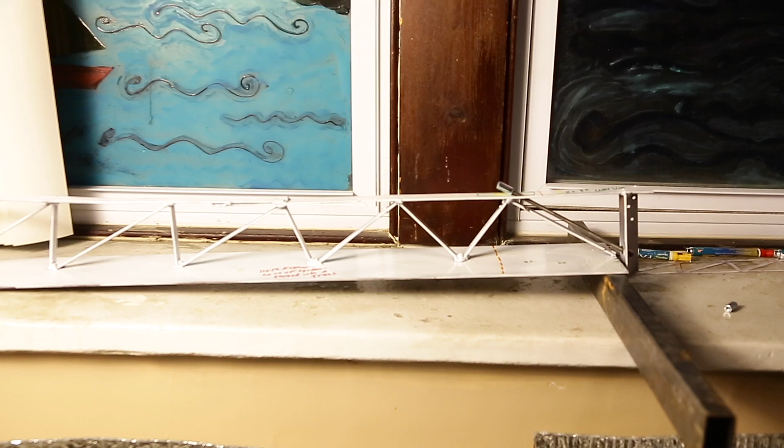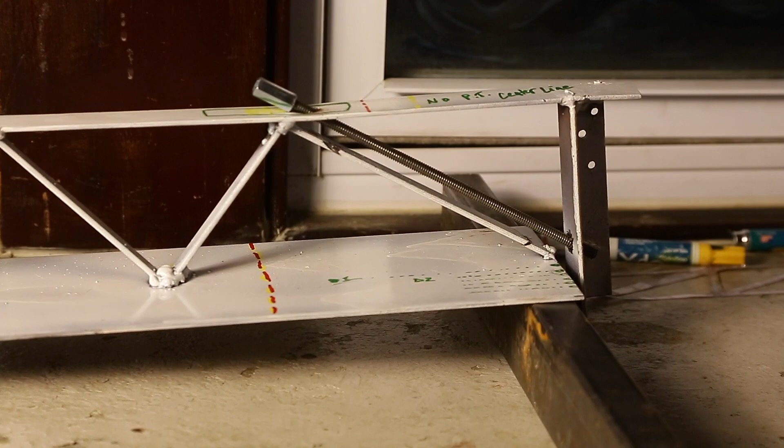Okay guys, so same structure. Now we're on video 5. I'm going to post a 3A, so it's a 3 and then a 3A. But in this, from video number 5, I cut, let me make sure I have the right video view, different camera. Gotta go this side. Don't want to block your lighting.

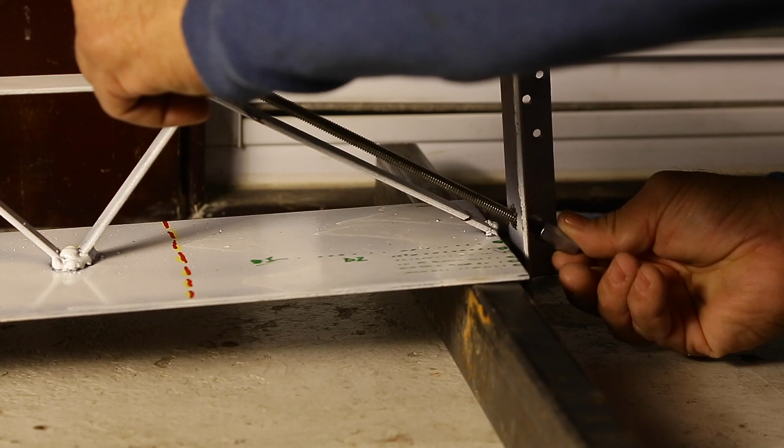So I cut number 11. See, it's cut. The bar has been detensioned, totally detensioned. The nut is off. That's important. If the nut's on, the range will be limited by when it hits the ends of the nuts, when it hits the limits. We'll keep it on just a hair.

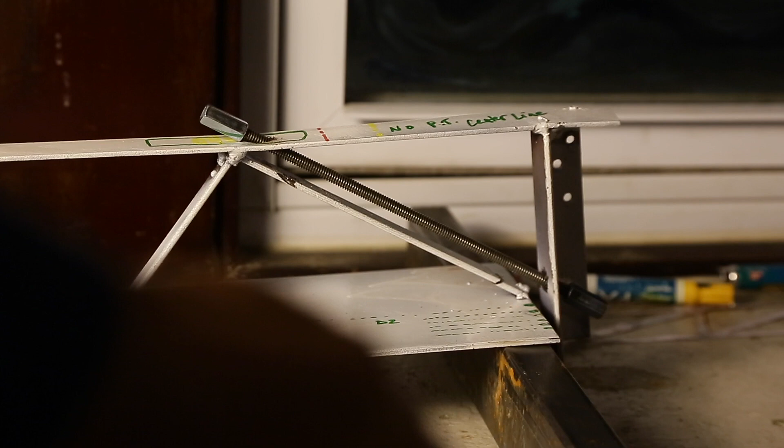I'm going to put not really insignificant, but just a touch of load on the center there. I'm going to zoom back in there and I want you to watch with this little bit of a load. Let's see if I can get it. This time I will not be able to stand on it. With this, it's just going to be a little hand pressure. And you're going to watch the deflection. A little bit of hand pressure.

And all I did was put a little bit of pressure, downward force right here. A little bit this time, like, doesn't take much at all. So this deflection is what creates this reaction down here. This reaction down here isn't created on its own. It has to have a load on it.

Right now, this is the dead load of this scaled model, not scaled to weight, scaled to size, plus or minus 3/8 of an inch max, I would say. This deflection here in the deck, the canopy and deck, will create the reaction out there. Now, but that's a compressive crack. Initially, I think when it had a downward force, we have the deflection happening at the moment they detension. That's in video number 3A, I think it is.

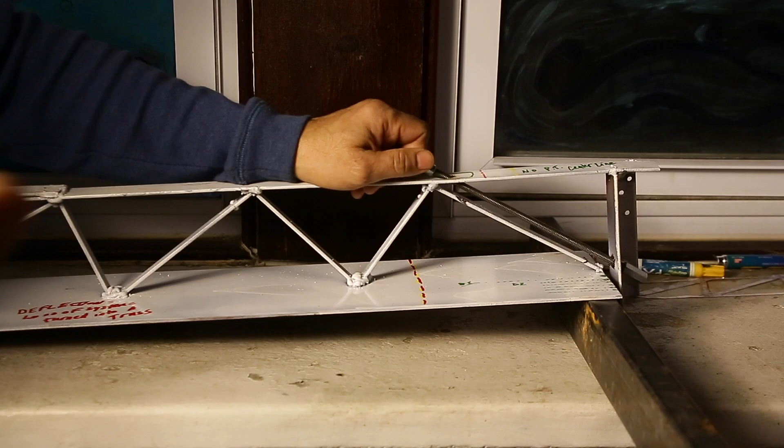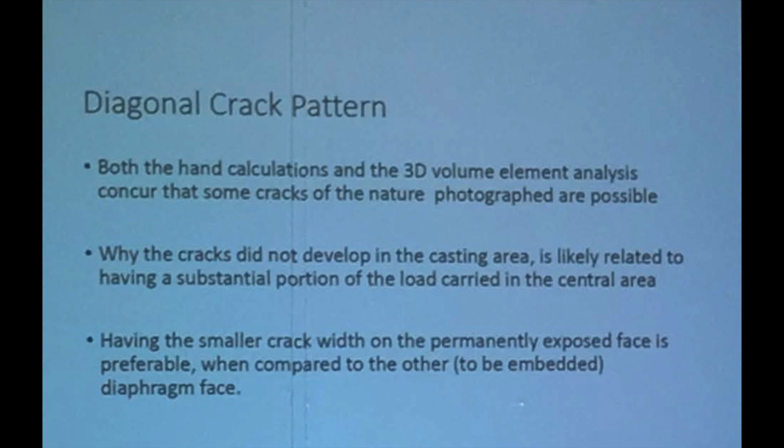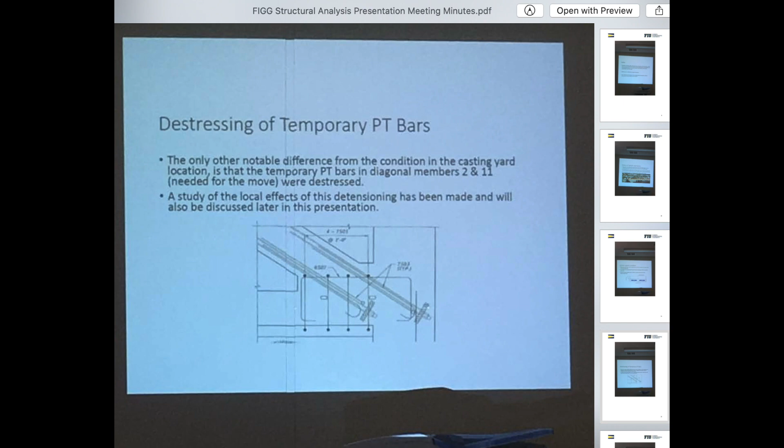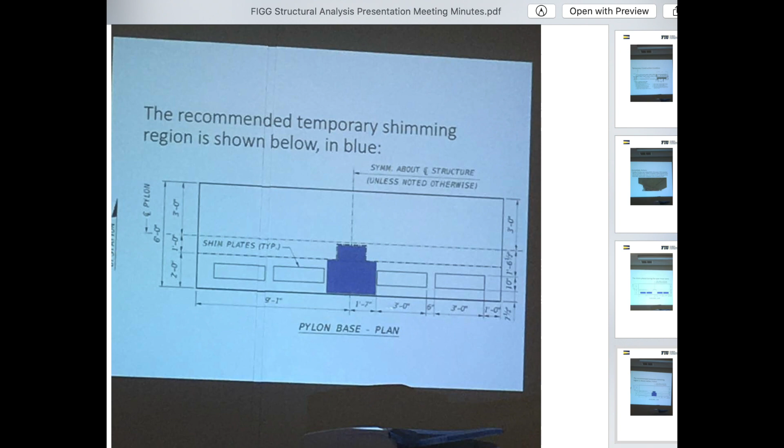They're going to add the shims after, part of their product, to help fix this issue. But yet, the shims are also going to contribute to the failure, because they're going to create a new moment, a new connection, a new pinned connection, if you will, based on the weight. And that's going to make that new hinge point, for your engineers out there. The shims created a new pin point. When they created the new clamping force, they had the 2 pin points and just broke it in the middle.

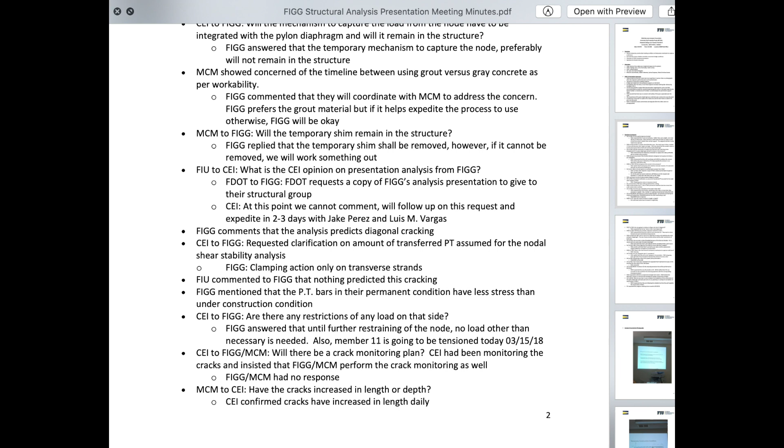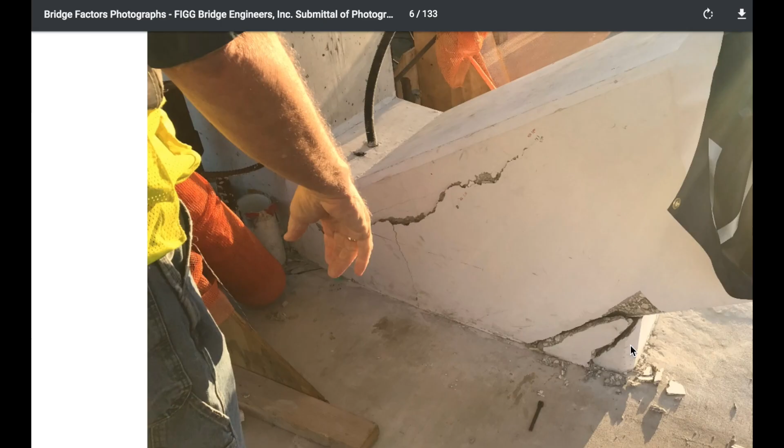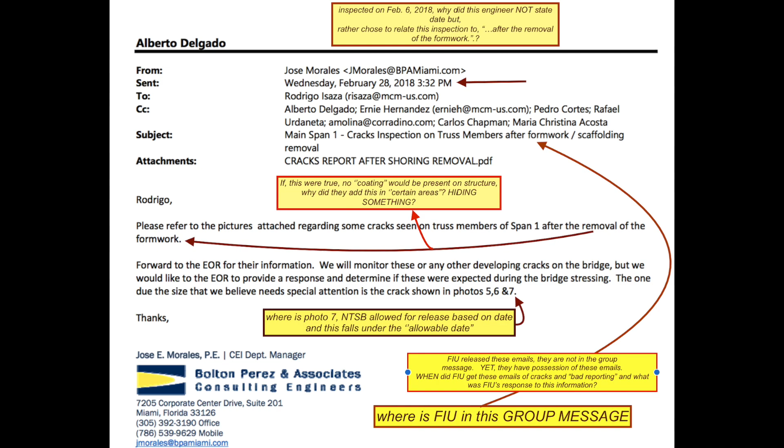And, of course, now we have these cracks. These are not compressive, because of what I just showed you, how that torque action took place. This is terrible. This is terrible to keep this hidden from the public also. I think I have it in 3A. That's what's important, and I've talked about this before, that they talk about the cracks happening when they took the forms away.

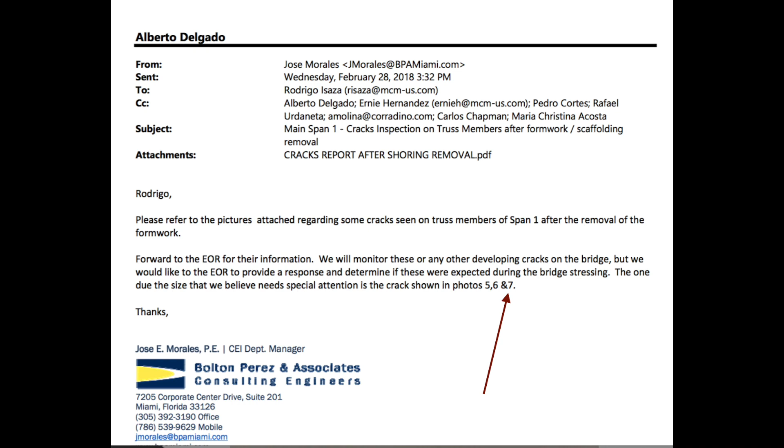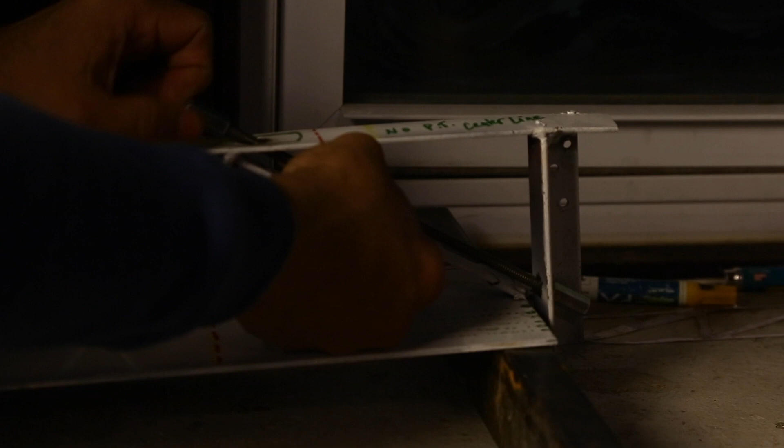Just a little bit of deflection. It doesn't happen on its own. This does not elongate and start pushing on its own. It needs a force to make it react down there. When you put the post-tensioning back on it, in the rod, this helps hold that connection together.

And so let me do that real quickly. I'm just going to do it live for you. Post-tensioning it back up. So now, of course, it's limited to the bar when I put the deflection on it. It is a smaller range. Let me make sure where I'm filming. Yeah. So it is a smaller range that it will cause destruction, if you will.

Once you detension, though, that range now gets all the way out to whatever it's detensioned to. And as they detension, it says it cracked like hell. It didn't really crack like hell. It was already there, as we show in video 3A and other videos.

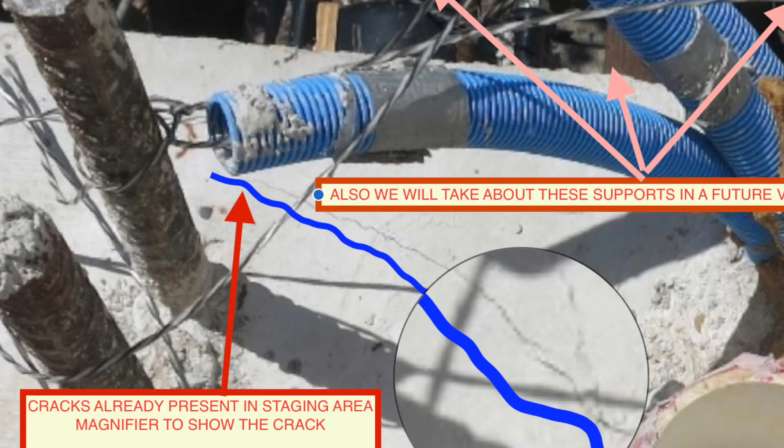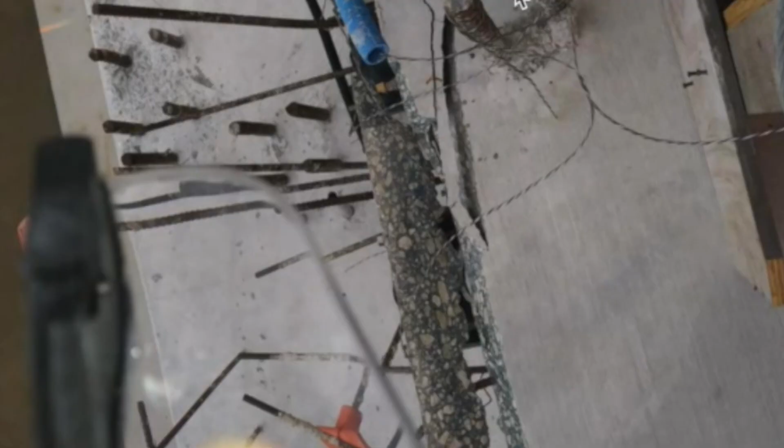Show the small hairline crack on the deck. That was the exact path of the current failure. So this already failed inside the staging area, and that's because of deflection. George, stop it. That's because of deflection.

Let's pull the rod out. It's stuck now. The rod's got threads on it. So now you can see the rod's out, and now we can get a super bypass. The sagging is so much that it lifts up, but the loads now are taking place between 9, 10 and the deck. This is no longer participating.

The loads here deflected. This had a pulling down effect right here, downwards. Not so much as I'm showing here, because we don't have a compressive or bypass. See the bypass here? It's not bypassing. It's actually pulling away, opening up. So that means there's more deflection right here and here than I can present with my model being steel. I would have to load it to show you. Let's see if we can do that again.

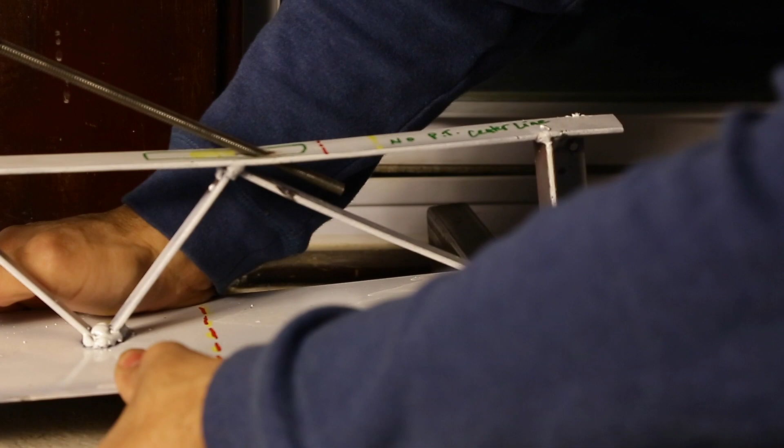That bypass doesn't exist though, because the cracks are of an open nature, not of that nature. The forces are being resolved in the post-tensioning in the deck and in the canopy. And this will be a top flange, wide bottom flange, and down to here. So they come to 9, work their way out. Also from 9 to here, but the span between here is supported structurally by number 10 and 9.

So it's able to say, you know what, I can transfer that load back down 10, take it up into this node here, and we'll still try to make the forces out to the end by coming across the top, 9 and 10. But at some point this is not structural anymore, it just breaks away.

And all the loads on the deck at that point, when it cracks like hell, remember it's already been detensioned in the staging area, these cracks have already presented themselves. It's already waiting for the detensioning to happen to expose, to develop the cracks further so you can see them. Then they're called the cracks like hell, which nobody can evaluate yet.

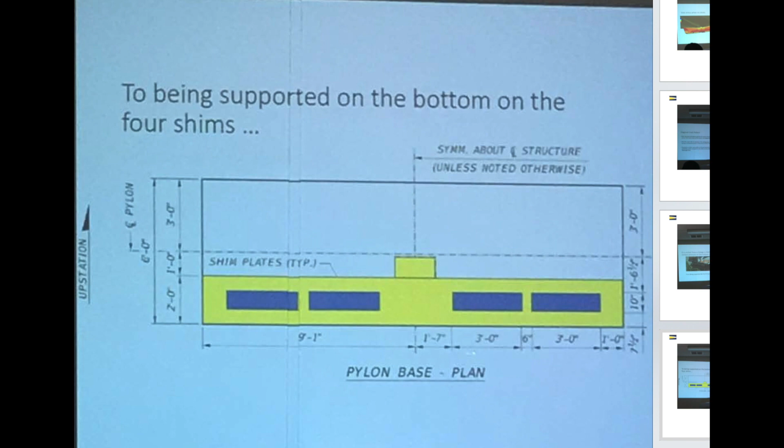And per the presentation, you see it here. It's unclear how the change in distribution did it. They aren't clear about whether being supported on shims could possibly lead to these top spalls. Question mark. He's not even sure if they're spalls. He put a question mark on there. They're not spalls. Well, they may be a spall, but they're indicative of the tensile forces created because of this torque action already. Let me get back to the video.

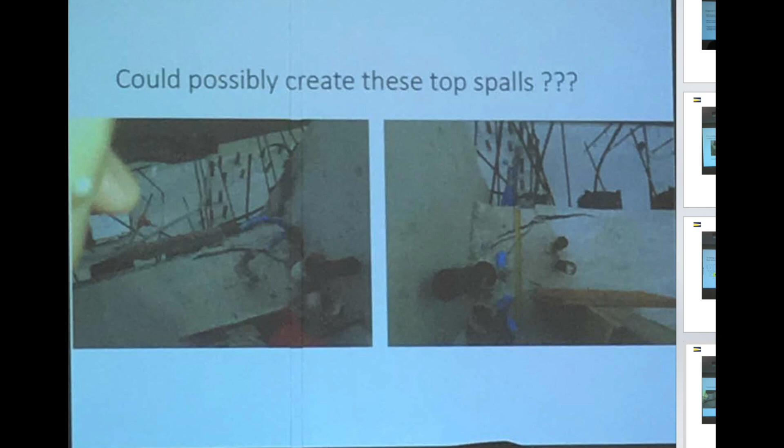Yet they had photographs of the hairline crack in the same path as previously. The person that took the photograph should have realized the significance of that crack being the same as the crack there. Should have said, wait a minute, this crack is the same. The only thing we did different was we got rid of the clamp force. And that clamp force was what was helping this. Now there's another caveat that's going to really help this bridge get to failure. But right now it cracks like hell.

It rebites onto number 11, which is still in there, 11A bar, and 12B bar, the upper bar. So I'm just going to snug it up to there without doing too much. I don't want it to lock in really. It's kind of a pain to get it out, believe it or not. So now it can only deflect as much as this will allow it, because this is a bar. It's holding it back from deflecting outwards.

That's when it rebites. That's the day of the 10th through the 15th, the fourth failure. It's like that. See the deflection there? So we get the deflection, but this also deflects up right here because we have some reinforcement in there that's also resisting.

Now, put shims under this. So let's take this away. Let's pretend like it's now on the base. It's the pier cap. There's shims under 12 now. When they go to post-tension, this is going to drag. That shim now has contact with the pier cap, the top of the pier. And it's going to drag. That's going to create resistance.

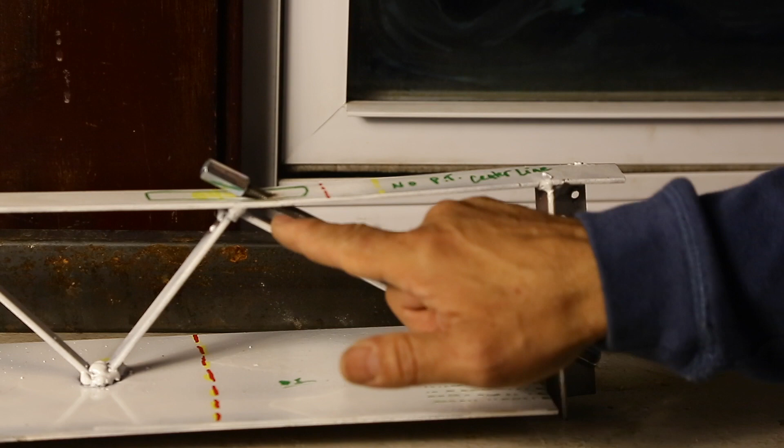But it's already cracked. It's already got a cold joint in here, while the NTSB or OSHA report, one of them, says it's a monolithic pour. This is not a monolithic pour. The deck is poured first, including a blister out here. This part here would be a primary pour with this one. The secondary pour would be up here, including number 11. So these two are poured together with a slight bit of chamfer in the middle.

So now you have this cold joint with some steel there, and Denney Pate tells them to put it back together. Well, you can imagine it's got a drag. Number 11's fair game. It can get 11 because 11's in the deck. It can create that compressive moment inside here. It's tied to the inside terminal of the diaphragm.

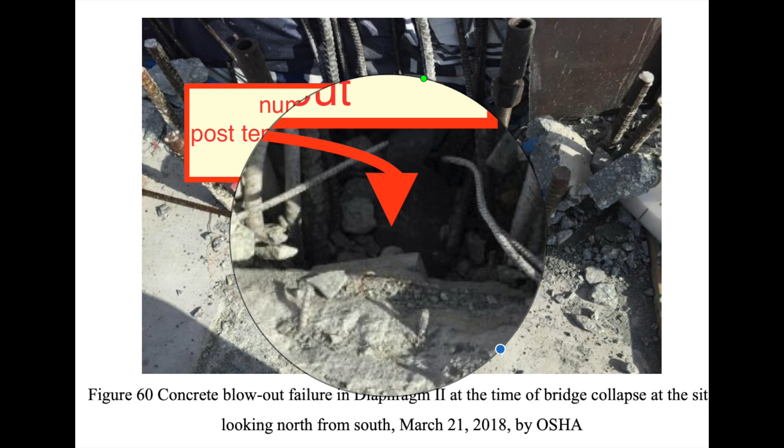It can compress, and we can see in the photographs from the NTSB OSHA report that, well, their number 11 didn't blow out. It didn't blast through. The back of the 8-inch plate didn't come through the concrete. There's no blowout there. But we clearly have blowout in number 12, the base of this.

Well, imagine if this is a cold joint and you now are applying forces right about there at the cold joint, and your friction is here on the shims now. So it's not elevated and then you brought it in and fixed the joint and then put it back down on the shims. No, they put it on the shims. So look what happens as you try to push. It's got a cantilever. See the action? It's going to try to straighten itself back up. It can't do that, of course. It doesn't have the ability to lift up 925 tons.

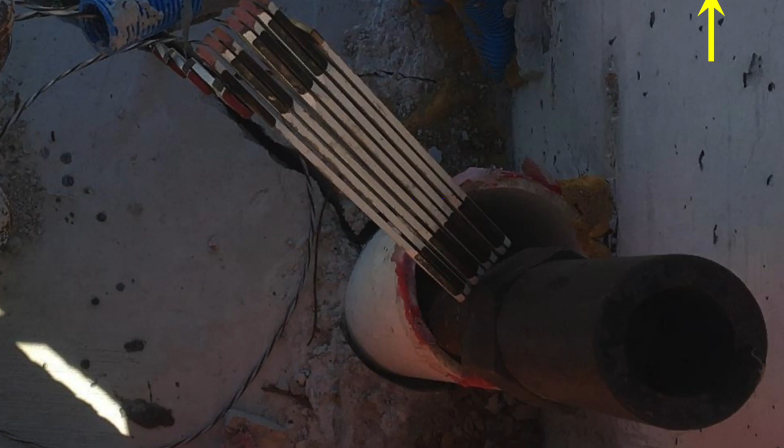But it doesn't have the ability to ratchet back up, level the deck, back up to the fine hair crack. As Denney Pate said, put it back to where it was on Saturday. Right, so you can't put it back, especially now because we identified that it's separated now. So when you're separated by even that little bit of a ½ inch to 1 inch plus, and you go to crank this plate inwards, you're creating a moment right here. Right, this is that rod. Look at my hand, bow in. It doesn't have the ability to just stay flat and drag in.

So this is what I'm going to refer to as the kinetic energy built up inside that clamp force was not resolved. And when they were post-tensioning the lower number 11, well, it resolved itself. I think along with the deck's kinetic energy, it's a constant moving energy. It's not in equilibrium yet, so that's why I refer to it as kinetic energy. It's not found its match, its equal resistance. So therefore, it's still working in an accelerated creep process, which is going to irritate some people, and that's going down towards the ground.

But the kinetic energy is there, and it's not met equal resistance. So therefore, it's present, it's active, and it's working on there. Think of it as someone leaning against you. Initially, you can hold them back while they're leaning against you, but eventually, you're not going to be able to keep holding them back, and you're going to fall over if they keep that force going towards you. It's the same thing here. Terminating that part of my explanation.

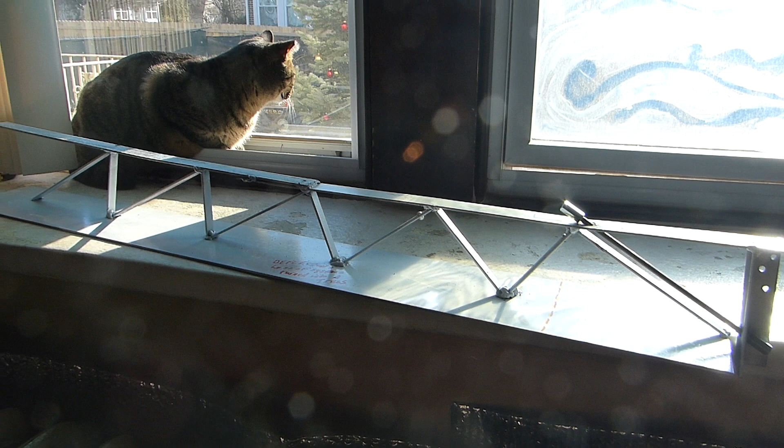Okay, today's video brought to you by George. Watch George turn around when I call his name. George. Hey, don't embarrass me. Georgie. That's right, good boy.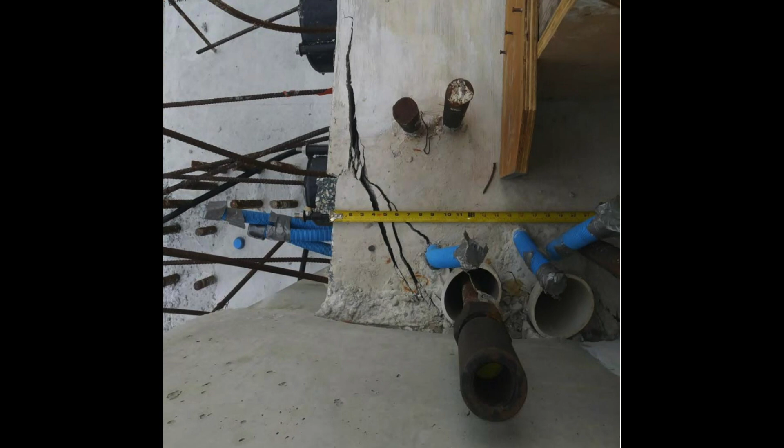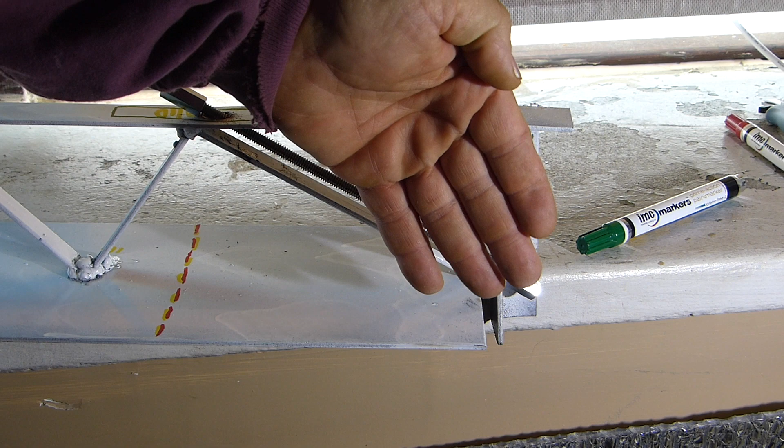Okay. So you guys can look up torsion, but this is how it would exhibit at the ends. The next couple of clips will show you how this exhibited in real life on the structure on each side, and the tape measure will even show from one side to the other that torsion I talked about. This indicates also why this structure is no longer in equilibrium when we see this twisted at the base of 12 like that. So here, just narrating over. That's that twist you can find in the other videos I've made of this.